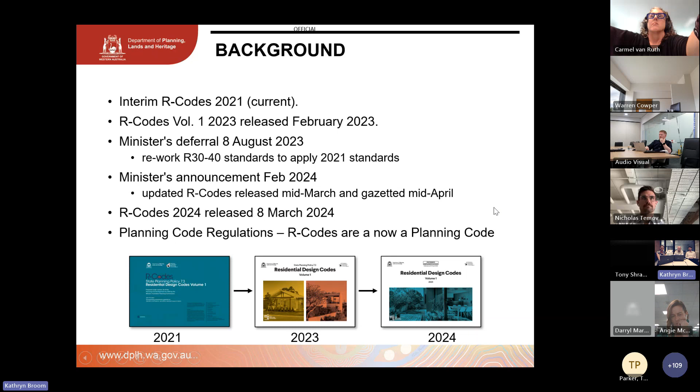So what was released last Friday are all the documents now on the website. It should be noted these are not fully operational until the 10th of April. The current 2021 R codes apply until then, when the new residential design codes volumes 1 and 2 will be gazetted, and the other documents will help in applying those.

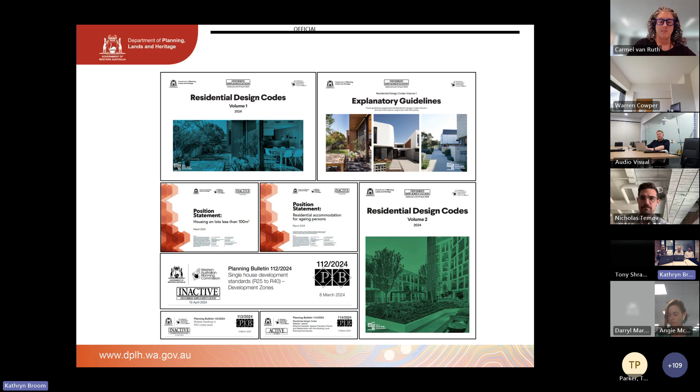So just a little code overview. We have the R codes volume 1 2024, broken up into four parts with appendices. Part A is the operation of the code. Part B applies to single houses from R2 to R40 - that change was recently made in response to the Minister's request. It applies to group dwellings in R2 to R25 codings, and multiple dwellings in R10 to R25. Part C, which was the medium density code and is now just Part C of Volume 1, applies to single houses R50 and above, group dwellings R30 and above, and multiple dwellings R30 to R60. There is also Part D, and we'll talk about what's in that part later in the presentation.

We also have the R codes explanatory guidelines, which have been published - these are very important and should be read alongside the R codes. We also have R codes volume 2, which will now apply to multiple dwelling developments R80 and above, and the residential component of mixed use development.

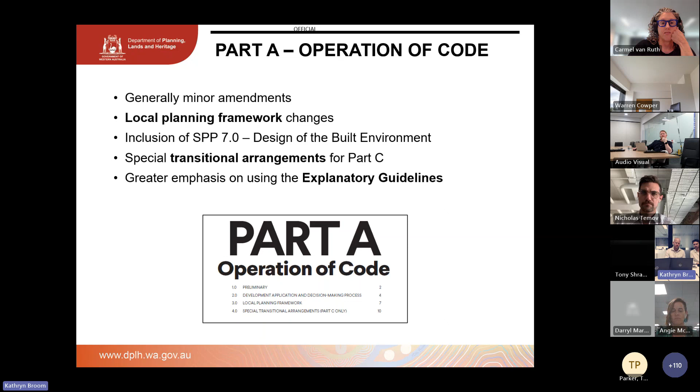For local planning frameworks, there are some changes. You'll notice in section 3 of Part A, the requirements and criteria to address when modifying the R codes through a local planning framework. There are two additional criteria: a suggested link with SPP7, and consistency with orderly and proper planning.

For Part C, previously there was a reduced need for modifications. That's not so much the case for R30 to 40, but for R50 plus, that Part C development, particularly for terrace typologies, there's much reduced need for local development plans to facilitate a deemed-to-comply pathway, as an example.

The modifications that now require WAPC approval essentially relate to additional elements - requirements around primary garden area, trees and landscaping, and solar orientation. But some previous requirements for WAPC approval have been removed, like needing access from a secondary street prior to primary. If you modify that in Part B, that no longer requires WAPC approval, which has been an ongoing inquiry both externally and internally at the department.

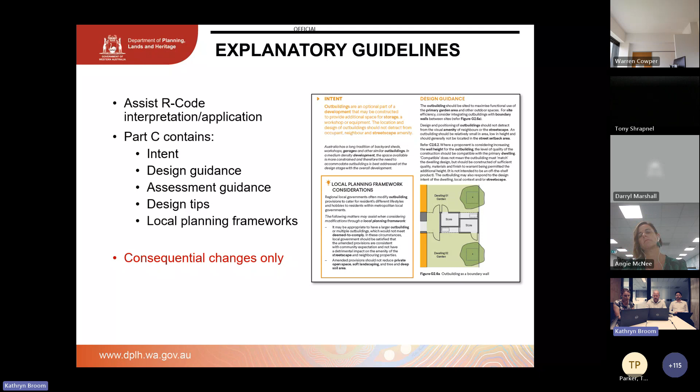It should be known that there were some consequential changes to the explanatory guidelines from the previous version that was published prior to September of last year.

In terms of Part B, there's not much change from the 2021 R codes. We have R30/40 single houses now retained in Part B, which was the major change from the Minister's request. The site area concessions now apply for small and accessible dwellings, and that will continue.

There have been modifications to ancillary dwellings, which has been quite in the press - they're now permitted on group dwelling sites. The minimum site area of 350 square metres required for ancillary dwellings has been removed, and one deemed-to-comply provision in the ancillary dwelling section of Part B has been removed. It was a bit ambiguous, talking about colour, roof pitch and materials having to be compatible with the existing single dwelling or group dwelling on site.

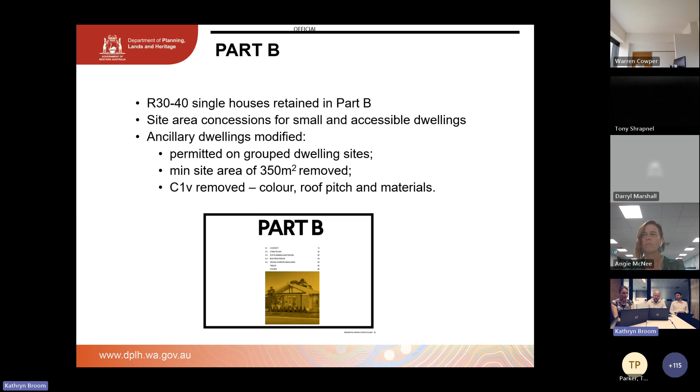However, there is guidance in the explanatory guidelines on how people may design or construct an ancillary dwelling that is suitable for the site.

Then we have Part C, which was the old medium density code, but is now just Part C of the R codes Volume 1. Similar to before, it's broken into 3 parts: the garden, addressing trees, private open space and water management; the building, which addresses indoor amenity, function of the dwelling and improving housing diversity; and neighbourliness, which talks about built form and character, how it fits into the neighbourhood context, and how the dwelling relates to the community.

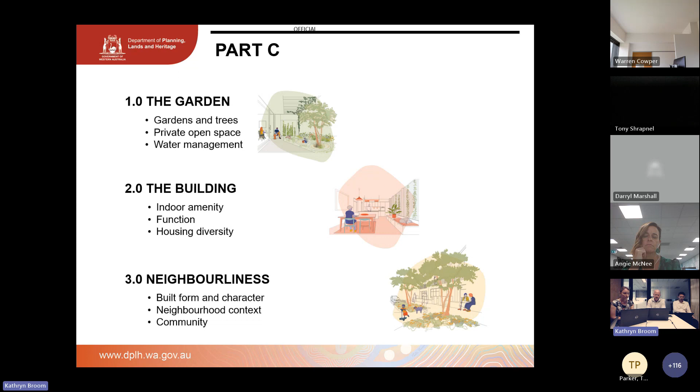Just going to pass you over to Jenna, who will talk about the garden and the primary garden area.

Thanks, Dan. So Chapter 1, the garden, contains element 1.1, private open space, and this element remains unchanged following the Minister's request for amendments. The aim of this element is to provide functional and usable outdoor areas, to provide consolidated spaces that focus on the primary garden area, to provide more space for gardens and trees with areas large enough to accommodate use for the occupant, as well as trees and soft landscaping. The space should be mostly uncovered to provide for daylighting and natural ventilation into that dwelling.

There are minimum requirements for the primary garden area size. They're based on site area rather than density coding, so that's a change from the 2021 R codes. There's a minimum 3 metre dimension to provide flexibility for a range of typologies, including group dwellings, and a requirement for 2/3 of the primary garden area to be uncovered. Where lots are smaller and more constrained, there is a requirement that the primary garden area is completely uncovered to allow for adequate daylighting and natural ventilation into these homes.

So the Commission would be seeking to avoid any modifications to these clauses through local planning frameworks, as we believe it's a critical element to the objectives and outcomes of the R codes.

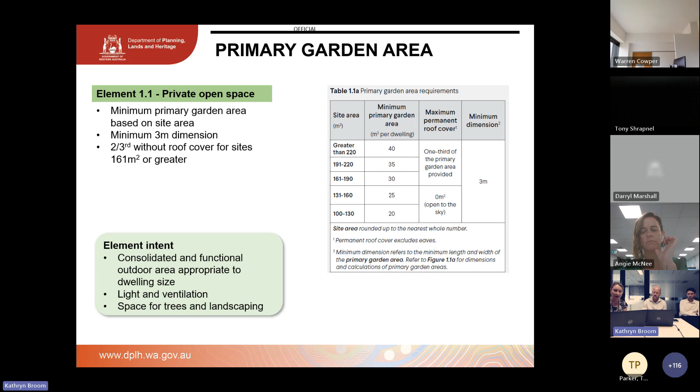Element 1.2, trees and landscaping, includes provisions which seek to improve the tree canopy on private lots and improve the health and growth of trees through appropriately sized deep soil areas and tree protections. They also seek to provide more permeable surfaces with more landscaping, less hardscaping than previously seen. There are requirements for at least 1 small tree per dwelling, with a minimum of 9 square metres deep soil area required for that tree.

Trees are also required in the primary street setback. In terms of compliance, it's up to the local government to enforce it. And various local governments are already prioritising urban greening and are supportive of planting on private land.

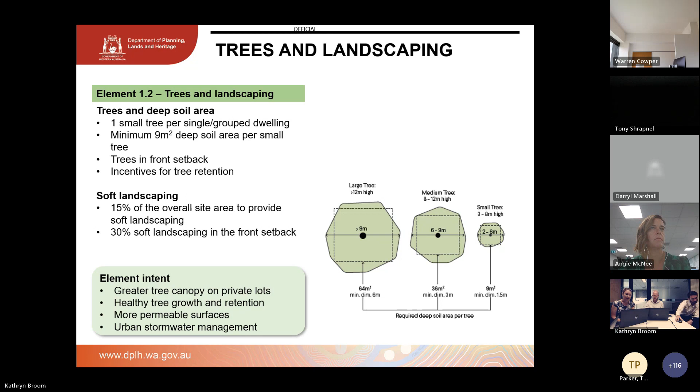There's a new defined term for soft landscaping that requires a minimum 300 mil soil depth, and 15% of the site is to be provided as soft landscaping with a minimum dimension of 1 metre. There is a requirement for 30% of the front setback to contain soft landscaping. This is a reduction from the 2021 version, which allowed 50% in the front setback, and that's to allow for narrow lot frontages on tighter site arrangements. These settings remain unchanged in the 2024 version.

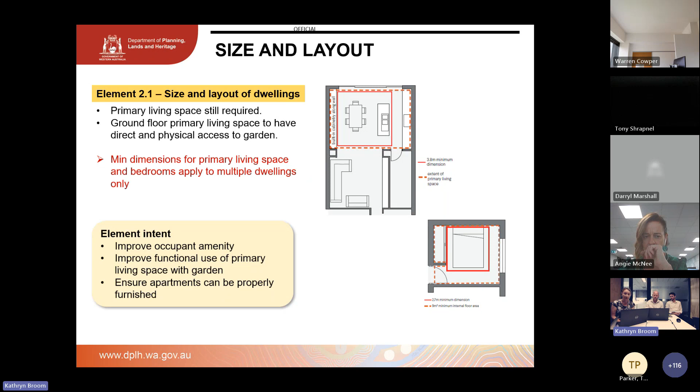The element 2.1, size and layout of dwellings, contains the most changes to Part C provisions following the Minister's request. A primary living space is still required per dwelling, along with access to the primary garden area or private open space. However, the minimum dimensions for the primary living space and bedroom areas have been removed for single houses and group dwellings and are now applicable to multiple dwellings only. This element seeks to improve occupant amenity and the functional use of the living area with a direct relationship to the garden, and the 2024 changes ensure that apartments are adequately sized internally and can be properly furnished.

Element 2.2, solar access and natural ventilation, remains relatively unchanged. There are still requirements for openable windows to habitable rooms and the solar access requirement to the primary living space. This requires a major opening for the primary living space to be oriented between east and northwest, with an adjoining uncovered area of 3 by 3 metres to allow solar access to enter that primary living space. While the area requirement for a courtyard is still applicable to all building types, the minimum dimension has been amended and now applies to multiple dwellings only.

The intent of these provisions is to enhance occupant amenity internal to the dwelling and to optimise winter solar gain and minimise summer sunlight into the primary living space in climate zones 4, 5 and 6, and reduce household running costs through better thermal performance.

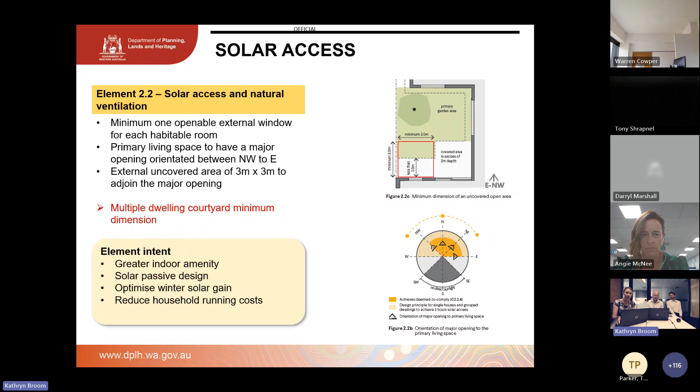The element 2.3 parking requirements are linked to the number of bedrooms and locational criteria. There are maximums for garages and carport parking, but no restrictions on other types of uncovered parking. For example, there is a 2-car maximum for 2+ bedrooms in location A. There are also minimum requirements: a 1-car bay requirement for 3+ bedroom dwellings in location A and B, and no car bays are required for dwellings with 2 bedrooms or less in location A. This allows greater flexibility for alternative parking arrangements depending on the market.

The aim is to reduce the extent of covered parking on site to allow more space for people rather than parking.

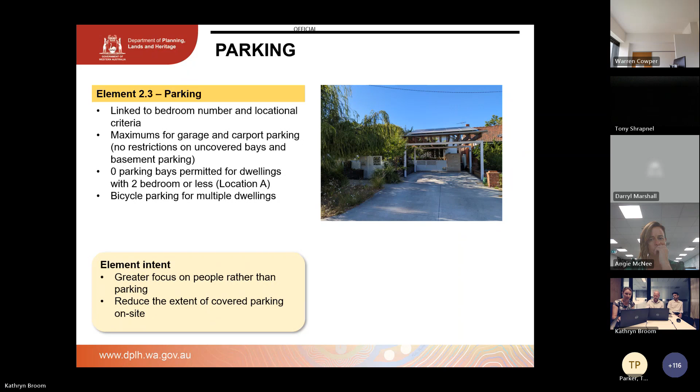The element 2.7 universal design remains unchanged in Part C. For accessible dwellings, there are no minimum requirements or occupancy restrictions. These have been removed as a modification from the 2021 version, where a gold level accessible dwelling is proposed and meets the requirements of the element.

A 35% site area concession is applicable. For 10+ grouped or multiple dwellings, there's a 20% requirement for silver level universal design, included in this version. There are checklists in the appendices that aim to simplify assessment when assessing a universal design or accessible dwelling. The intent of this element is to encourage greater housing diversity and support ageing in place.

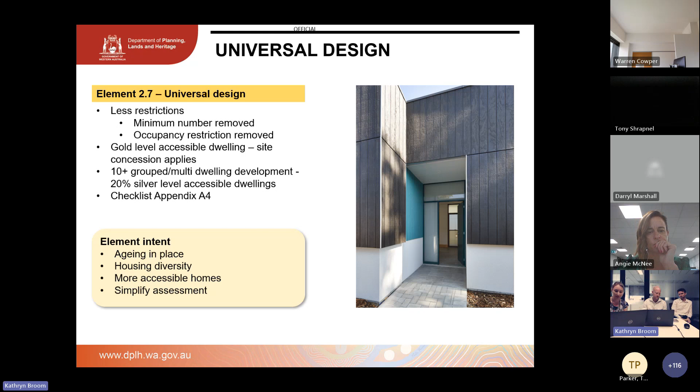Element 2.9, small dwellings, aims to provide greater housing choice and affordable infill options. There's no limit on the number of bedrooms permissible in a small dwelling. However, the 70 square metre internal floor area applies to single and group dwellings, and there's 60 square metres for multiple dwellings. The internal floor area definition differs from the plot ratio area that was previous in the 2021 version, in that internal walls are excluded from the calculation, so a slightly larger dwelling may be possible.

Small dwellings that meet the requirements of this element are permitted a 35% site area concession. As part of the 2024 amendments, this element, as well as the universal design element and associated site area incentives, have been included in Part B and apply to R30 to R40 single houses.

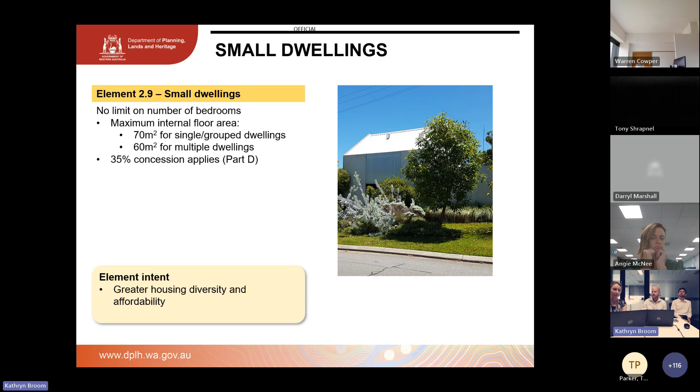Element 2.8, ancillary dwellings, applies to all dwelling types: single houses, group dwellings and multiple dwellings. There's no minimum lot area requirement in Part C, but an internal floor area of 70 square metres applies. The intent of this element is to broaden the application of ancillary dwellings to provide greater housing diversity, affordable housing options and ageing in place. There have been no changes to this element from the 2023 draft.

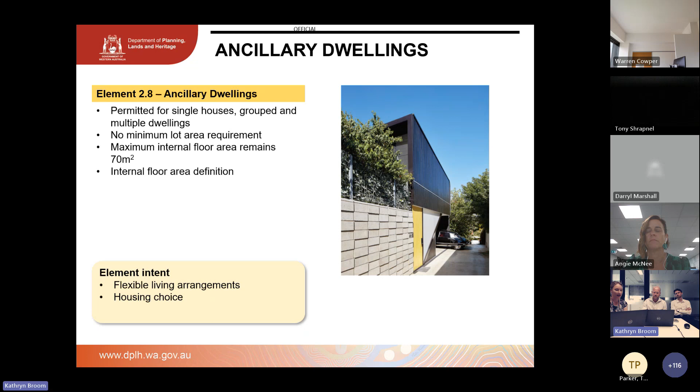And I'll hand over to Katie now to run through the neighbourliness chapter.

Hello, section 3 is neighbourliness, and element 3.1 of neighbourliness is the site cover change, which, as part of the transitional arrangements, the change from open space to site cover is going to be deferred for 24 months until the 10th of April 2026. The current open space calculations include common property and portions of covered outdoor living areas, verandas, and that will continue to apply until April 2026.

After transition, site cover will replace open space as the measure for the extent of building that covers a site. The calculation's been simplified and percentages increased to balance the change. During testing, it was found that the size of primary garden area influenced the amount of site cover, so we don't expect a significant change in outcomes. The 24 months aligns with the transition period to allow developers to adjust to the new definition.

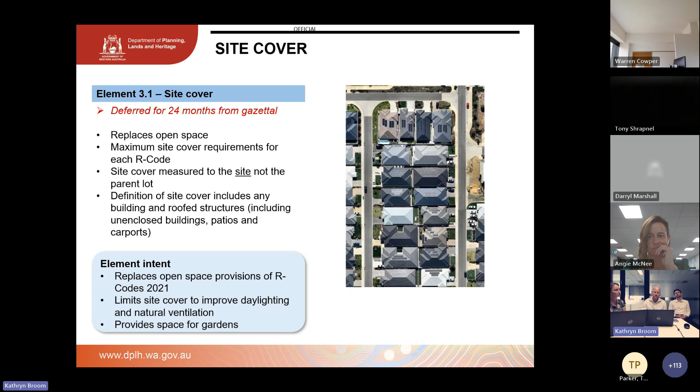Building height, element 3.2. The building height requirement has been adjusted to be measured in storeys as well as metres to allow increased heights in higher coded areas. For R30 to R40 group dwellings, the height in metres remains much the same, but has the addition of being required to be 2 storeys. For R50 and above, a 3rd storey and an additional 3 metres is allowed. For R80, a 4th storey and a further additional 3 metres is allowed.

The addition of storeys provides flexibility for proponents for more generous floor-to-ceiling heights and improved internal amenity, while the height in metres maintains certainty for the community and assessors. Building height is still based on maximum wall and total building heights relative to roof types, and modifications for specific contexts where additional height may be desired can still be sought through local planning frameworks.

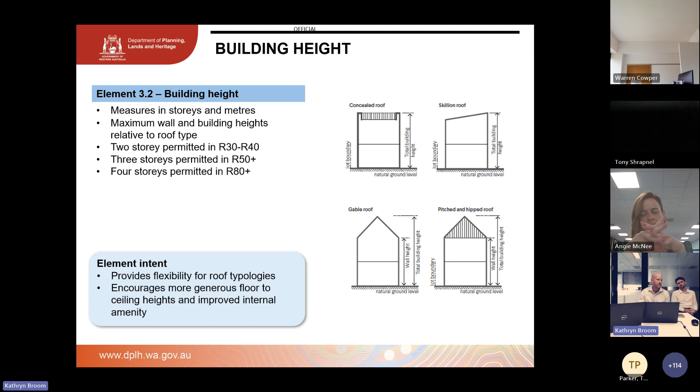Element 3.4, lot boundary setbacks. The lot boundary setback table has been significantly simplified. Up to 3.5 metres high, a simple, straightforward 1 metre setback. Up to 7 metres high, a 1.5 metre setback, and above 7 metres, a 3 metre setback. Second storey walls set back less than 3 metres are limited to 14 metres in length, and in R50 and above, 2-storey boundary walls up to 14 metres in length are permitted, subject to overshadowing requirements, and they are no longer restricted to only be allowed on 2 boundaries.

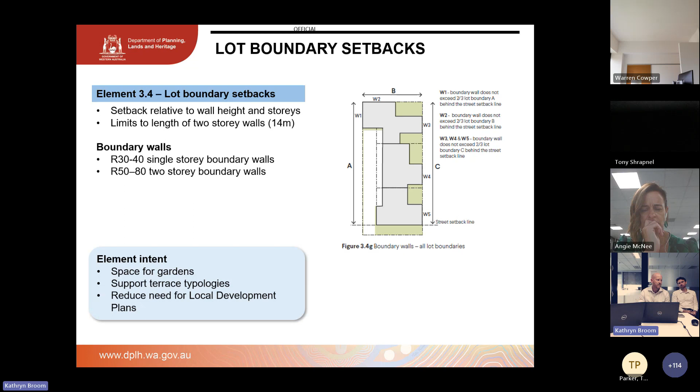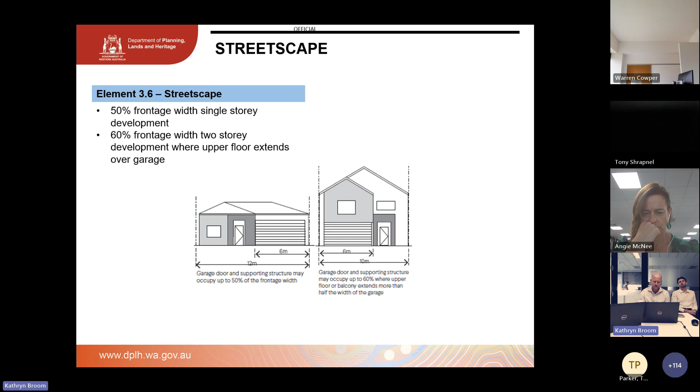3.6 streetscape. The garage width calculations remain the same as in the 2021 code at 50% for single-storey development and 60% for 2-storey or greater where the upper floor extends over more than half the garage. The figures for Part C clarify that a porch, veranda, pier or post in front of a garage is considered to hide that portion of the garage and reduce the garage width as viewed from the street.

The visual privacy element, 3.10, provisions are much more context specific and provide for more diverse and innovative solutions. The cone of vision may be allowed to extend beyond the lot boundary where it can be shown that there is no actual conflict. Where a development adjoins a vacant site, however, as the potential conflict is unknown, the cone of vision must remain within the lot boundaries. It's intended to reduce the use of highlight windows and increase internal amenity and the internal and external visual appeal of the solutions for visual privacy.

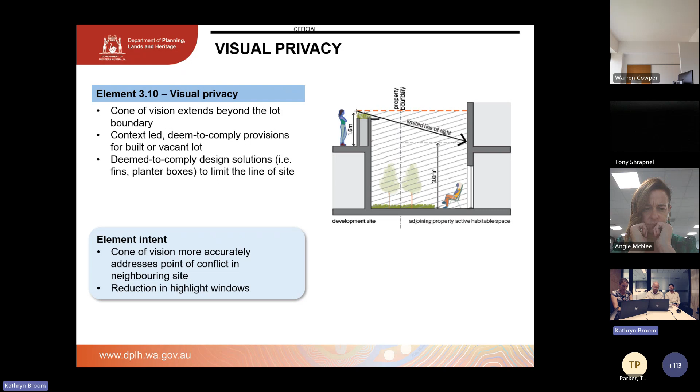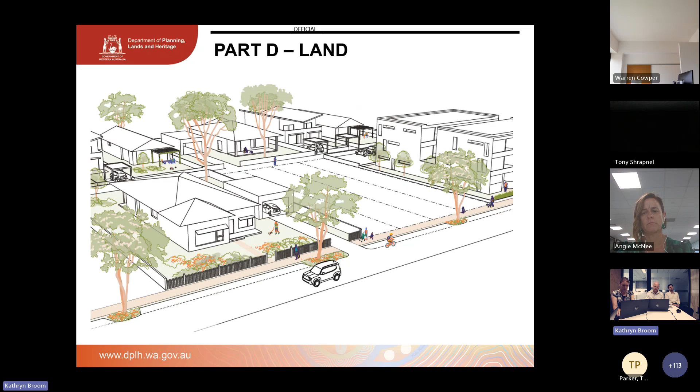And then Part D is the land, outlines the site area controls which relate to both low and medium density codes. New provisions within Part D relate to the medium density, or 30 to 40 groups, and 50 plus single dwelling coded areas only.

The site area concessions are the most significant change, with accessible and small dwellings which have already been discussed by Jenna in the building typologies. So what I've got here is very much about that. The concession for accessible and small dwelling types has increased from 1/3 to 35%, capped at a minimum site area of 100 square metres.

The universal accessible dwellings have increased internal floor area up to 110 square metres, as opposed to the 100 square metre internal floor area limitation for aged independent persons dwellings. Small dwellings, as Jen has already mentioned, have the same 70 square metre internal floor area limitation as single bedroom dwellings, but without the bedroom limitation, there is much greater flexibility.

Small dwellings are limited to 50% within any one development to maintain diversity, while accessible dwellings in 50 plus coded areas can access concession for up to 100% of the dwelling.

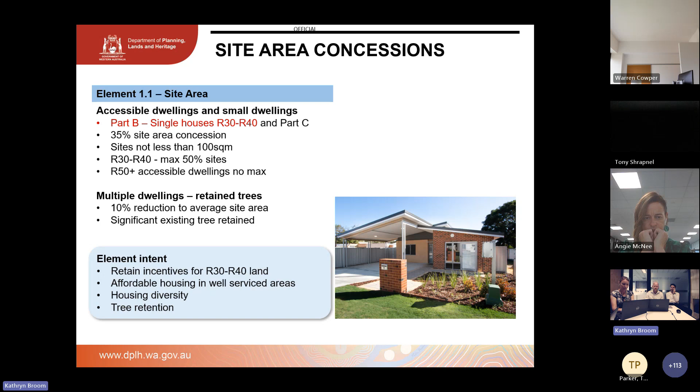So one thing you'll notice from the Minister's changes is that in 2023, Planning Bulletin 112 RMD was being rescinded. That has, in a sense, been rebirthed with R30 to 40 single house development remaining in Part B. But you'll notice that R60, the RMD 60 being dealt with under Part C, is now subject to being removed and subject to transitional arrangements.

So what that means is that an RMD local planning policy will still apply in full up to R40, but the RMD 60 at the end of the special transition period, Part C will prevail over that. So it's likely local governments may amend these to remove it at the end of the special transition period. There's a lot of these provisions baked into local development plans, so there's a few different moving parts there.

In terms of anything else to say on that, yeah, next slide. So RMD is here to stay for a little bit longer.

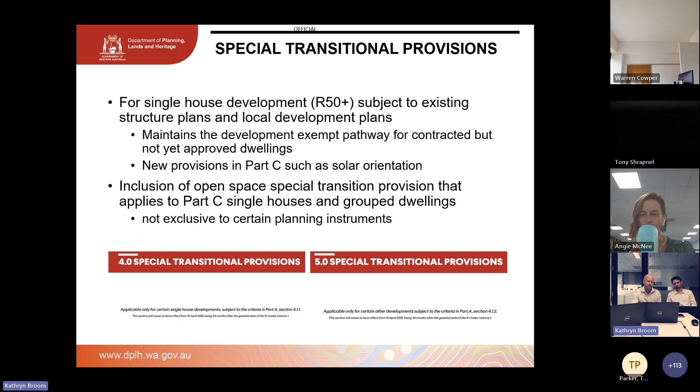There is that inclusion of the open space special transition provision that Katie spoke about. So that's just deferring site cover controls until the end of the special transition period, and that's for the whole Part C essentially. It's not exclusive to local planning instruments. Yeah.

Local governments will be assessing these proposals on the basis of the framework applicable on the day the decision's made. Statutory timeframe is 60 or 90 days depending on advertising. If you're lodging a DA now, you can't anticipate it being approved under the 2024 code. It would be approved under Part C where applicable, for example R30 plus for a dwelling, or an R50 plus single house.

In the special transition period, that's also true for building permits. If you're trying to rush through some building permits, just know there's a bit of risk there if there's any hold up. So that's at your own risk.

Local governments will be reviewing policies throughout the special transition period with a view to alignment. We've also said the R-MD policy will be aligned to have effect at the end of the special transition period. If they don't do so, Part C prevails for R-Codes anyway, unless otherwise dealt with in an LDP. So that should be fine.

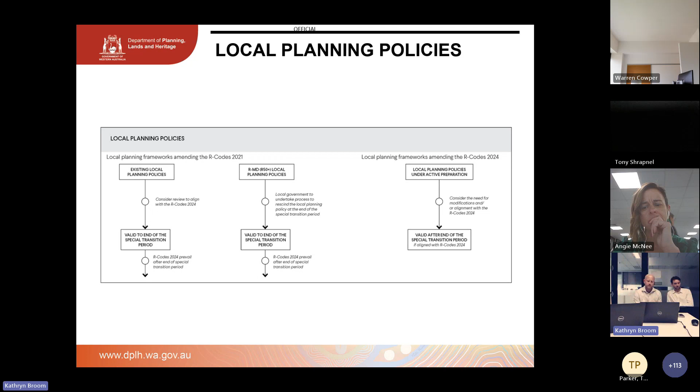So just be mindful in any development applications you're proposing, it's not just Part C - be mindful of those existing local planning policies as they'll continue to modify Part C. I think that's everything on local planning.

Moving on to local development plans - they're obviously a bit different. They've got an expiration date under the regs, so they're not impacted by the change in policy. Essentially, they live on until expiry, and will continue to modify the R-Codes Part C as they otherwise did until expiry.

There's an expectation that local government might amend these, just to change the wording and provision reference to improve their assessment of it. If the legibility isn't great, for example if it references an old provision that's now been reworded to something different - outdoor living area, primary garden area are fairly straightforward, but there are some other examples where they might do that just to improve their own processes. Just be aware of that.

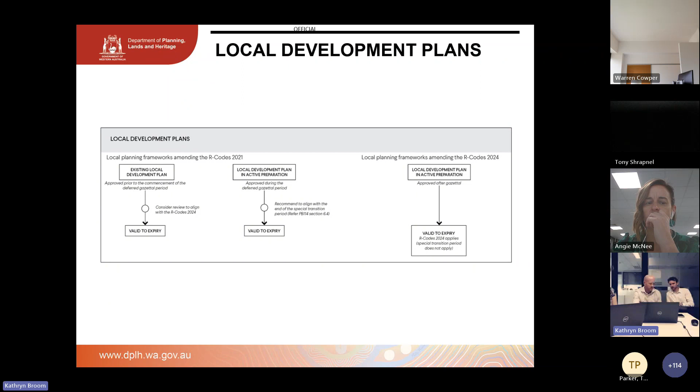I think that's everything on local development plans.

Thanks, Matt. That basically concludes our presentation for this morning. We've run through the key changes in Part C, the key changes that came out of the Minister's request at the end of last year, and how this impacts the local planning frameworks.